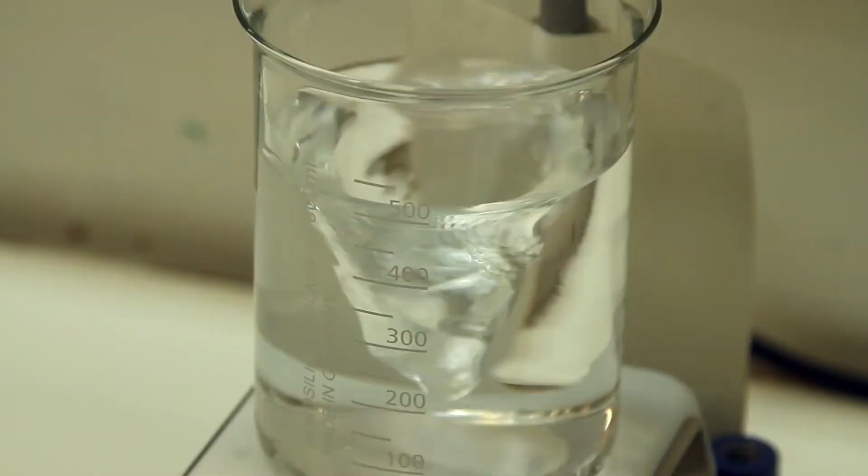Space technology, chemical industries, high-performance computing, science and technology, energy transition. AI possesses the encompassing potential to power up the materials and energy sector of the country.

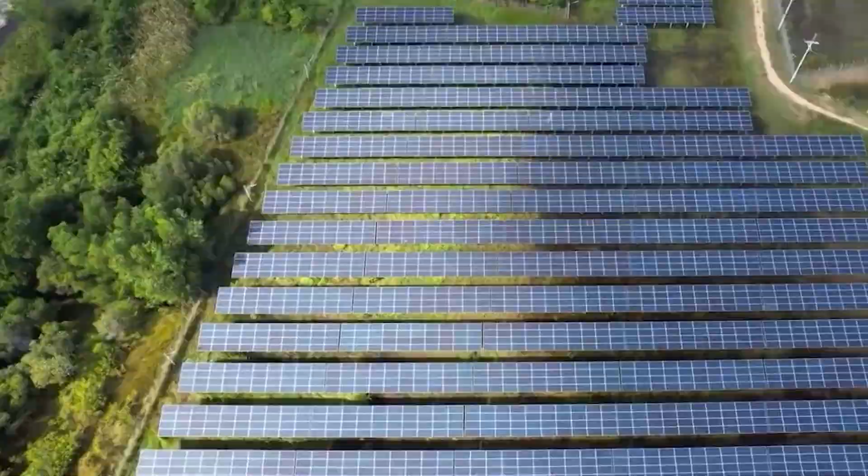AI-driven solutions are used to optimize both renewable and traditional energy systems all over the world. In the renewable energy space, AI assists in site selection for solar and wind farms by analyzing geographical and climatic data, ensuring that installations are placed in optimal locations.

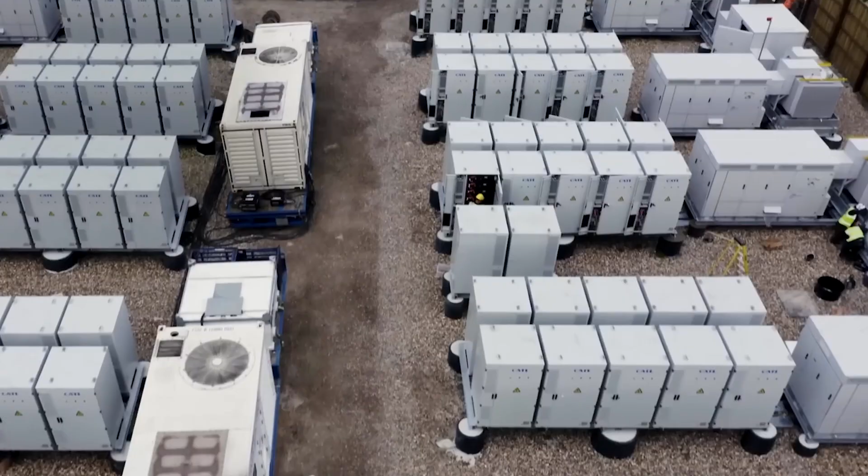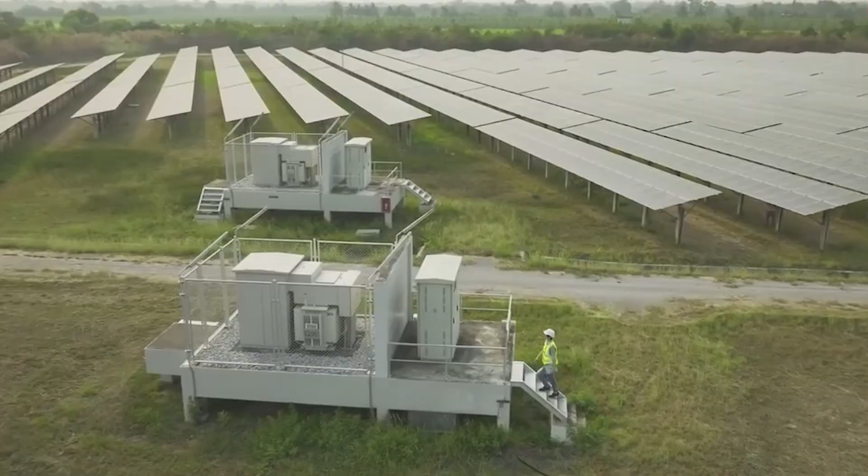Government agencies are looking into tapping AI to detect issues in the energy grid, to prevent outages, and ensure smooth operations across power plants in the country. These developments illustrate AI's potential to revolutionize the energy landscape in the Philippines.

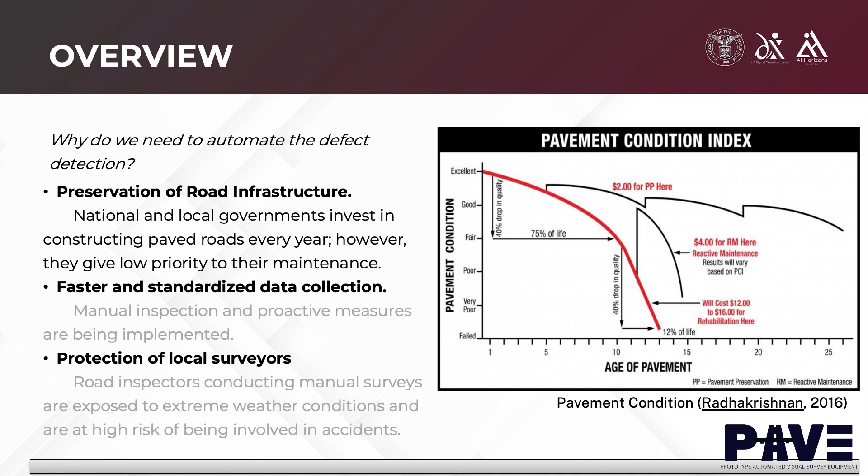This condition of road is used to optimize the budget, resources, and the timing of application of appropriate maintenance and rehabilitation techniques.

Currently, these defects are being monitored on the national roads manually by our local surveyors, meaning they are walking along the road to take note of these defects, the location, and the measurement.

While most of our local government units implement a reactive method, they rely on reports from our citizens. Because of this data gathering, there is a high potential of being subjective in identifying these defects, as well as identifying the severity of these defects.

Actually, my hypothesis is, depending on the region, we will have a different dominant defect. If the region has high temperature, for instance, we have asphalt road, we have lots of rutting. However, for those regions that have high rainfall, we can have a lot of potholes.

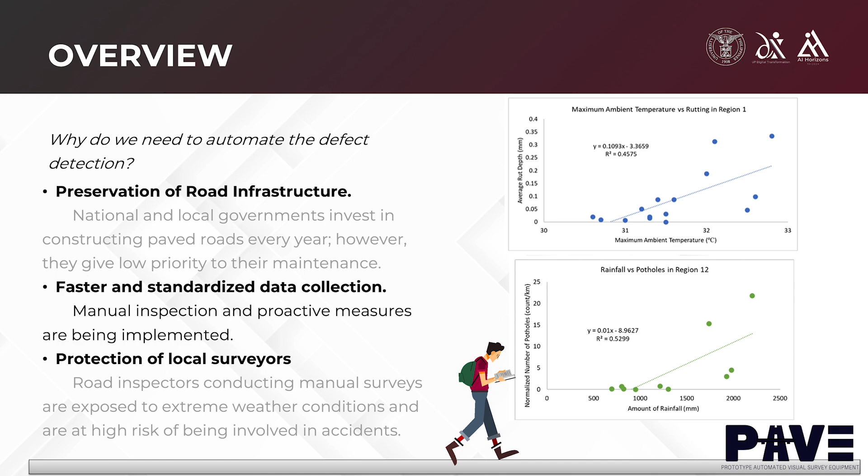We can improve this prediction by improving how we collect this data. I believe our data can be improved by predicting the service life of our road, and we're able to promote the prolongment of the life of the roads.

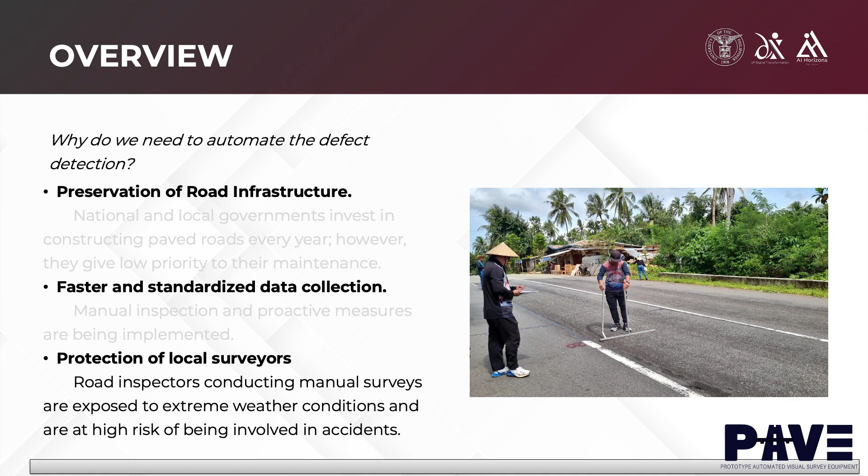Other than that, since they are doing it manually, our local surveyors are exposed to extreme weather conditions and the risk of being involved in accidents.

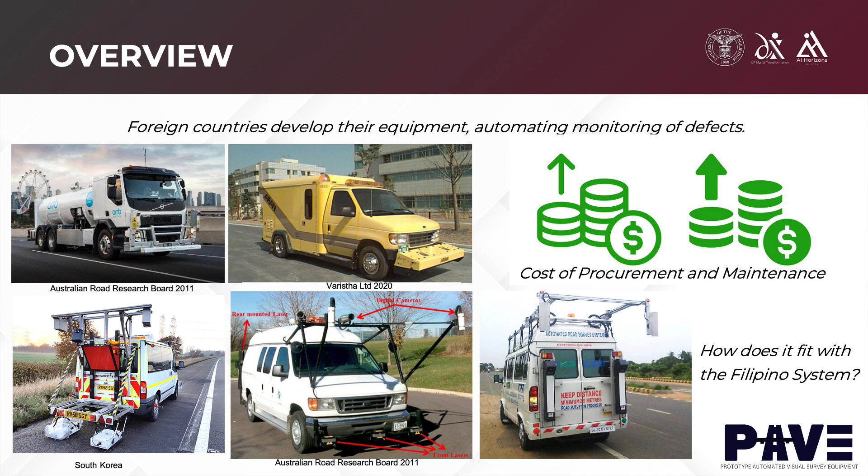In fact, other countries have all developed this kind of equipment, but why don't we adopt them? Because of the cost of procurement, as well as the cost entailed with the maintenance. So if we need to calibrate the equipment, sometimes we still need to go to the country where it was manufactured or produced in order to be calibrated.

And other than that, there are issues on the fit of this developed equipment with our system. So why not we build our own? So this is the inspiration of the Prototype Automated Visual Survey Equipment.

We designed this equipment for our engineers to inspect the condition of our roads and to reduce the subjectivity and safety hazard, and to increase the efficiency of data gathering, unlike the manual methods.

Our prototype consists of detachable hardware that can fit pickup trucks, which is the most common model of the car that is being used in road surveys.

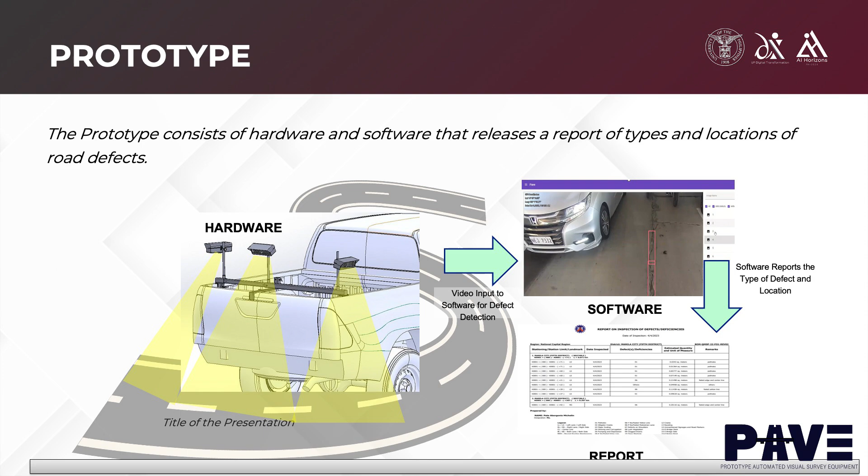So we designed it to be detachable, and after that, it will collect video footage of the road surfaces. This video footage will be inputted into the software that we have developed, and this software will summarize the report. So this is how the hardware looks like.

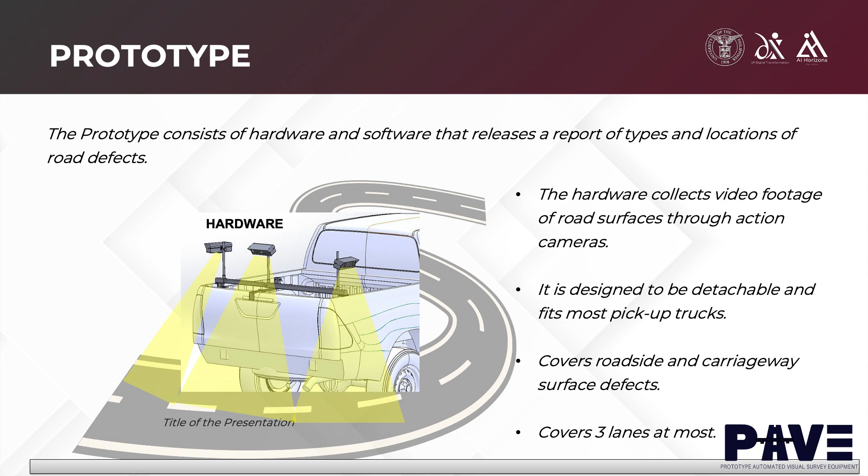So we have cameras directing to the road surface, and they're collecting video at around 40 to 80 kilometers per hour. And then we're going to input that into the software, and the software will translate this video into images.

And from the images, it will detect the defects. It will group the images with defects and without defects. So with that, it also has a function wherein the road users or the user of this program can correct the identification or the missed defects.

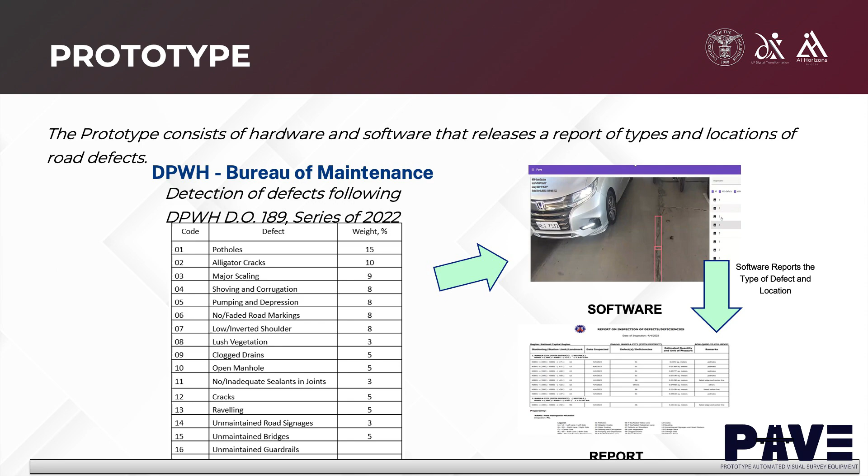So the detection of defects is based on Department Order 189, series of 2022. So this is how the software looks like. You can see a box with different colors where the box indicates the type of defect.

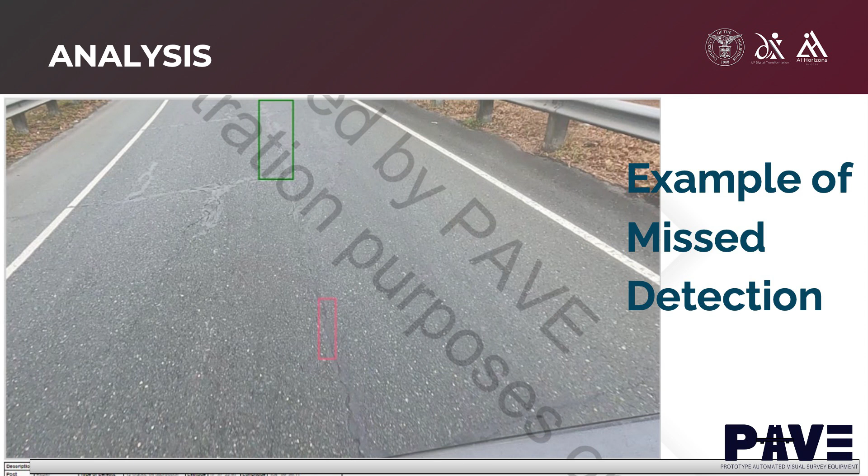So as you can see, there is still some room for improvement in the equipment, and we're open for collaboration for the ongoing work on development of the program.

And this is how the report looks like, where the location of the defects is indicated, as well as the code of the defects and what type of defects it is. It has also estimated the measurement or severity of these defects.

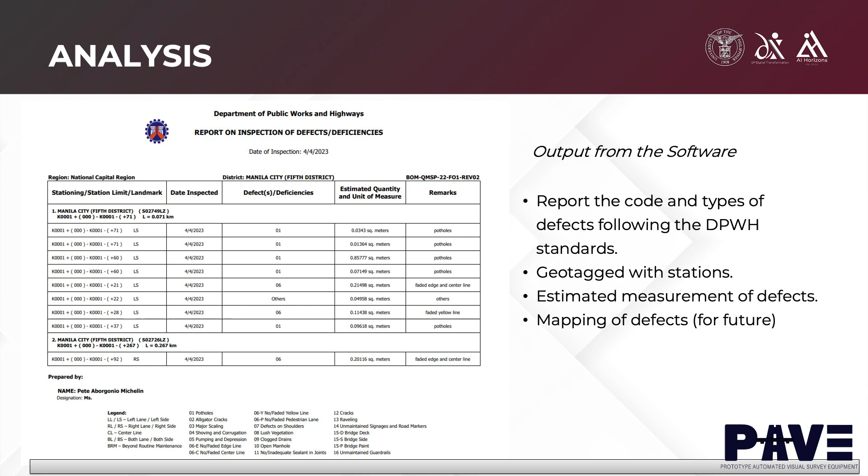We have validated this equipment together with the DPWH BOM, but we only did our own comparison with what was detected and what we can see in the images. Based on our validation, it is around 67 to 75 percent accurate in terms of detecting and identifying the road defects.

So in summary, the Philippines should prioritize expanding road length together with maintenance and a pavement management system. The PAVE project designed and fabricated a prototype that can assist local surveyors in monitoring road defects.

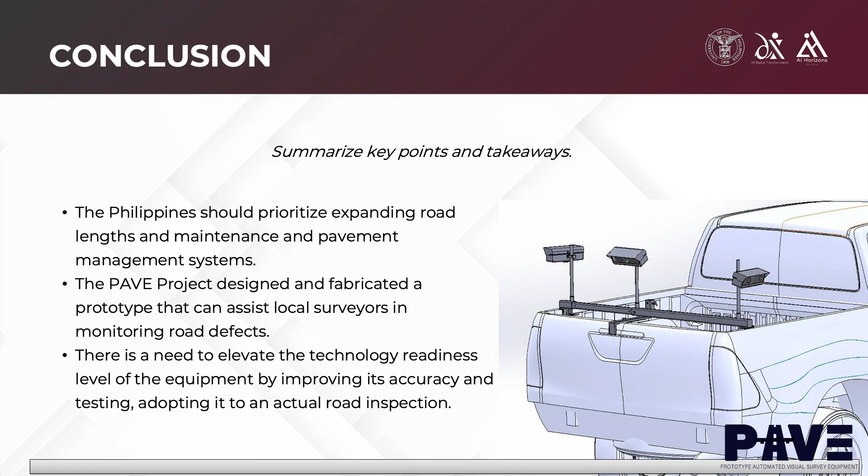There is a need to elevate the technology readiness level of the equipment by improving its accuracy and testing, adopting it to actual road inspection. That's the end of my presentation. Thank you.